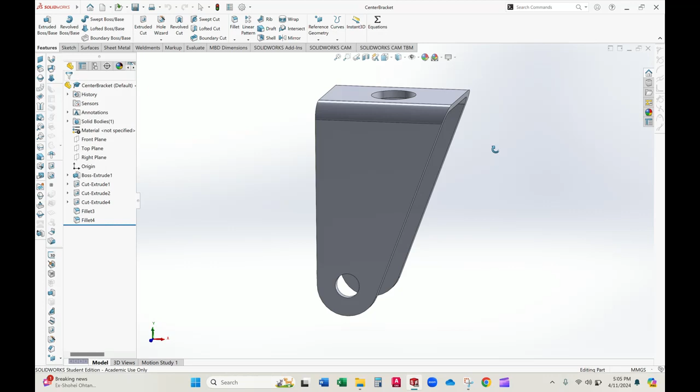All right, welcome back. We're going to be revisiting this center bracket that we made for our wheel caster assembly. Because realistically, if you were going to produce this, you probably wouldn't machine it out of billet. You'd probably just stamp it out of sheet metal. Well, SOLIDWORKS has some really great tools to help us do that.

What I'm going to do first is I'm going to get rid of these little fillets that I put in. Just going to right click them, delete, and right click, delete. Now I'm going to convert this into sheet metal. Now I've got some sheet metal tools over here on my window, but if you don't happen to have those up, real easy way to find it, go up in here into your search and just start typing convert, and there you go. It pops right up.

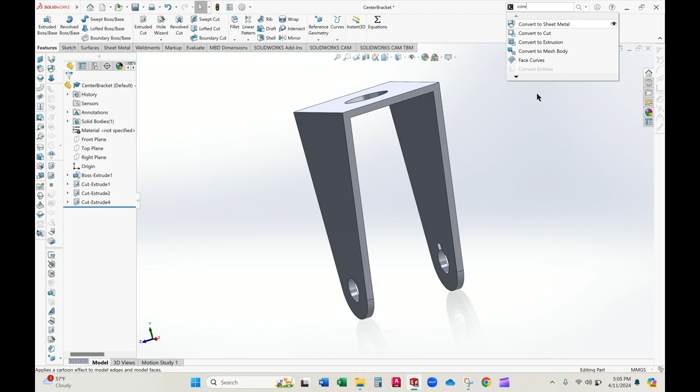Convert to sheet metal. Now it wants to know which is the fixed surface. So when it gets stamped, I'm going to choose this bottom internal surface here. It wants to know the thickness. I put in my 2.38. It wants to know the radius of the bends, and that was 3 millimeters.

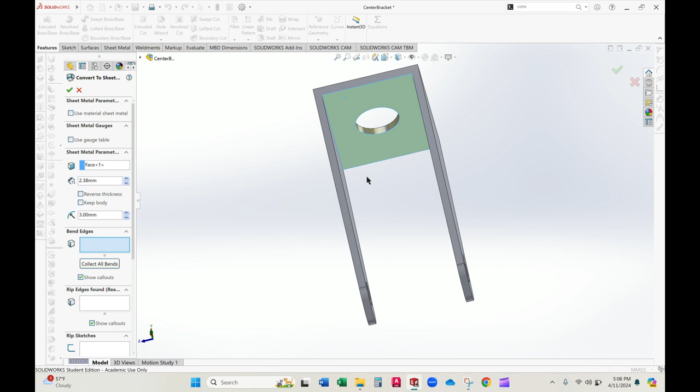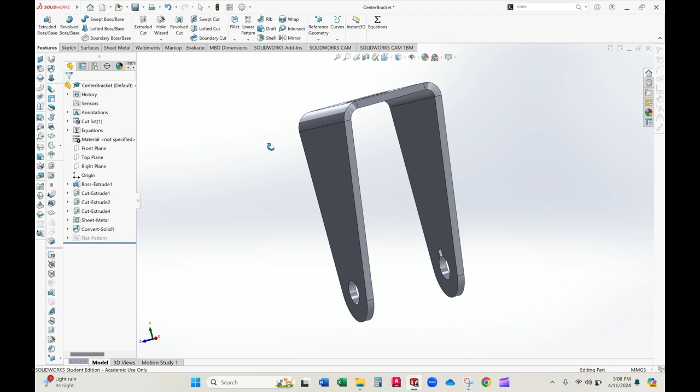And now it wants to know what edges are actually being bent. And that will be these internal ones, the edges that are contacting our fixed surface. There we go. Green tick mark. And now it has just turned this into a sheet metal part. I know it looks rather similar to the part when it was machined from billet, but now that it's out of sheet metal, there's some really neat little tricks that we can do.

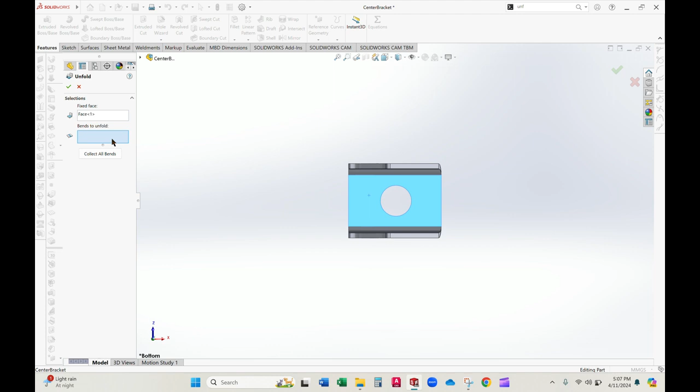And I grab myself a bottom view of this, and I'll show you. If I come up into my search window and start typing unfold, there we go. It wants to know the fixed face. I select the fixed face. It wants to know which bends we're going to be unfolding. And that's the top and bottom. Green tick mark. There you go.

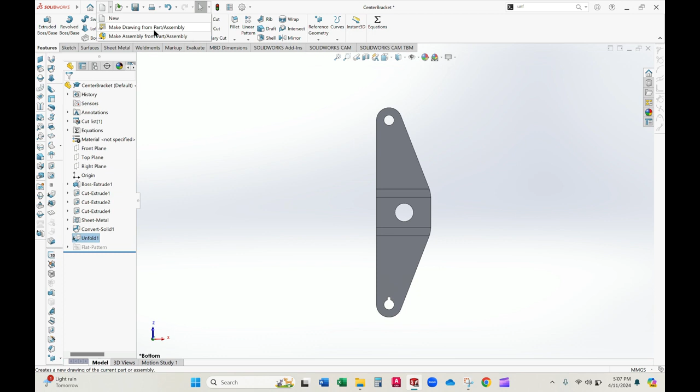That is the piece of metal that you would have to cut out, which could then be folded into that shape. It compensates for the K factor around the corners, so you get the right shape at the end. So now what I can do is I can go up here next to the little arrow next to new and say make drawing from part. And I do want a drawing. And you can pick whichever format you want it in. I'm just going to run with the A ANSI landscape for right now.

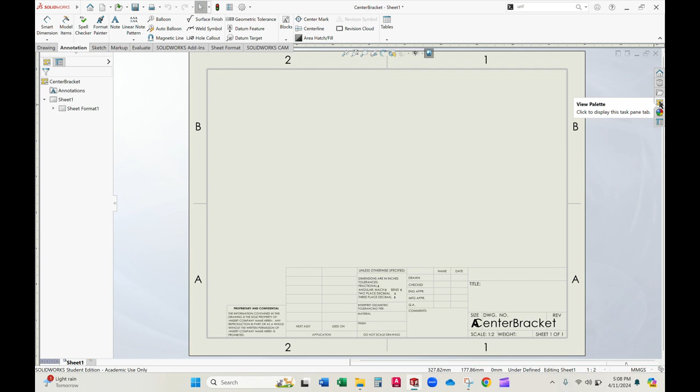And one critical thing, you want to make sure that we're working in metric to keep it consistent with everything we've been doing up until now. I'm going to come up here to my view palette. I'll grab my top view, click and drag it out onto the screen, side step, and it will give me my other, I believe that would be my right view. Click the green tick mark.

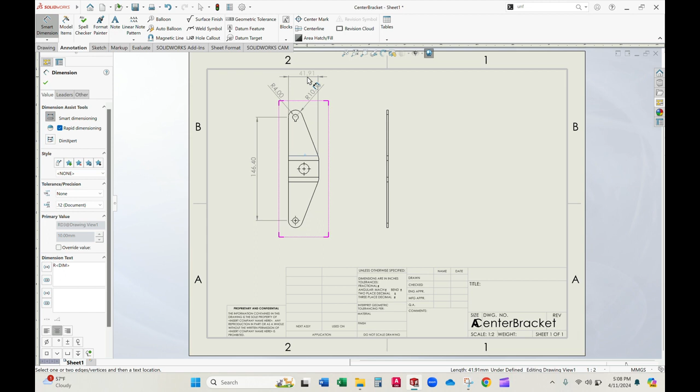Now I can grab my smart dimension tool real quick like. I can just start grabbing dimensions off of this guy that the shop would need to be able to crank them out in mass. I know this is just kind of sloppy, quick and easy, but you can see how this tool is really, really useful. If I took a couple of minutes to clean this up, I'd have myself a real nice little blueprint. And zoom on in here, get the thickness,

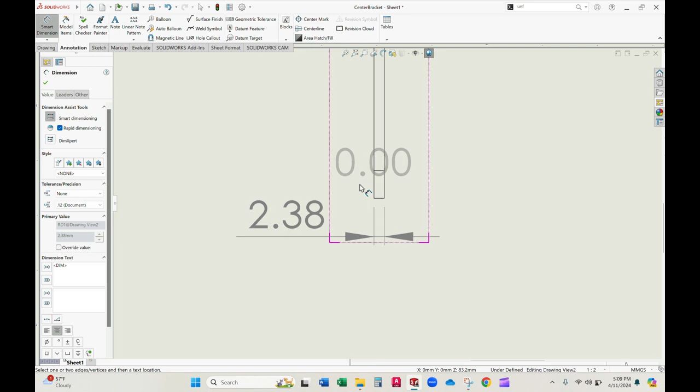grab this guy, come all the way up here, grab this guy, and now I've got my overall length of the piece of sheet metal. Just like that, I got myself started a nice little blueprint with all the measurements I would need to actually build these out of sheet metal.